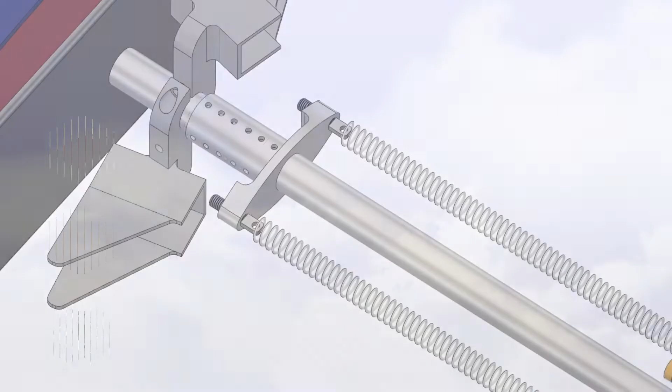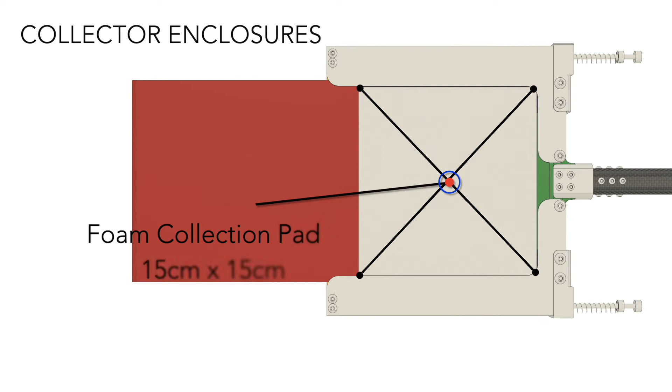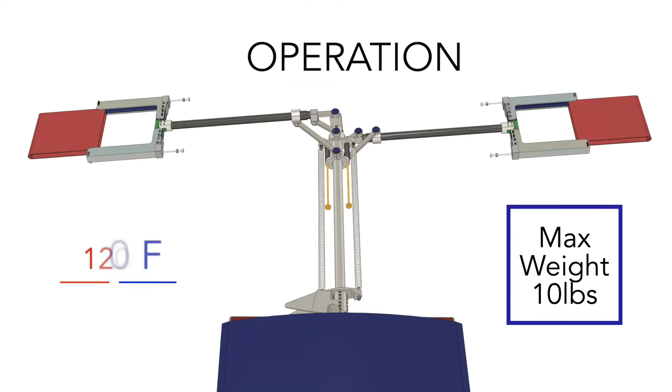The drive shaft of the subassembly shall couple to the output shaft of the control module's motor. The collector enclosure shall open upon rotation of the system and expose the collection pads with a surface area of 15 by 15 centimeters. Upon activation of the motor, the lever arm shall extend to a pre-calculated 1 meter fixed position. The less than 10-pound subassembly shall operate between -40 and 120 degrees Fahrenheit while rotating in either direction at 100 RPM.

Our final model will include aluminum 6061, carbon fiber, polycarbonate, and Teflon. This design was constrained to be a completely mechanical subsystem to improve the reliability of operation. At the same time, our team worked closely with our partnering electronics team, Icarus, to ensure compatibility between the control and collection subsystems.

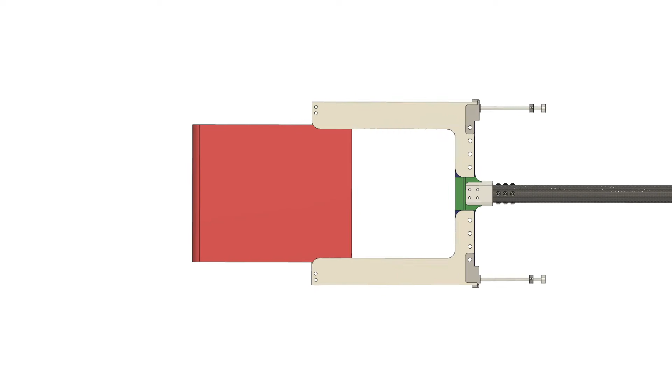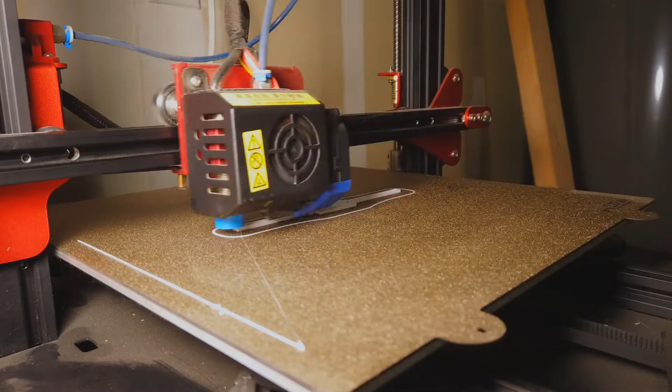Fusion 360 provided 3D modeling capabilities to create our design, animations for visual demonstrations, and 2D drawing functionality for fabrication requests. After creating the 3D models, we used Cura to slice those models and prepare the G-codes for 3D printing. Printing allowed us to stay on schedule by creating the necessary parts to complete the prototype quickly and cost-effectively. By controlling things like infill, wall count, speed, and bottom and top layers, we were able to control the quality and time necessary to complete a print.

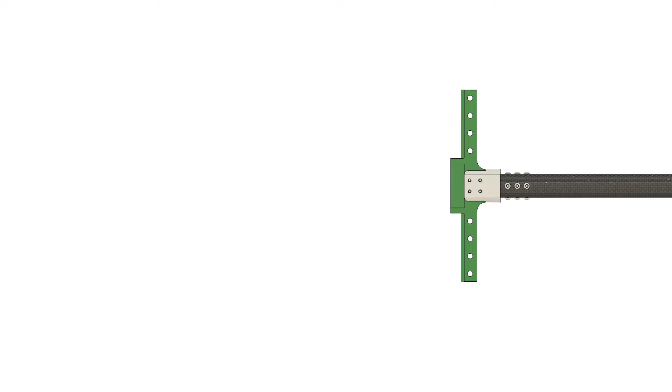It was evident that with the number and complexity of custom parts needed, it would not be feasible to manufacture them ourselves using university machines before the end of the semester. We first reached out to third-party machine shops around Texas, but received high-cost quotes out of the desired budget of the project.

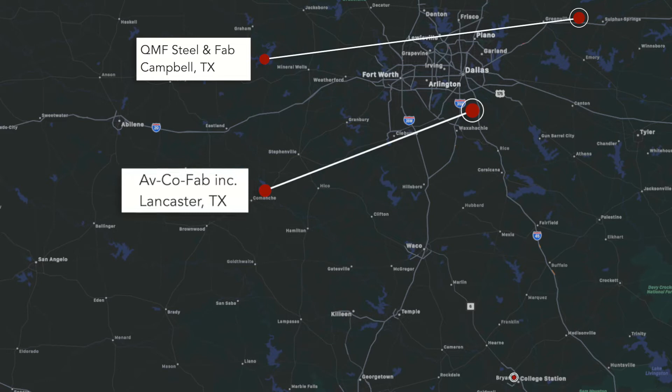It was then decided to utilize the FEDC's fabrication request process on campus, which only requires the purchase of raw materials. It was then only necessary to submit engineering drawings and model files to the FEDC, and material orders through our sponsors in order to manufacture the 85 total parts. This approach allowed for minimization of cost without sacrificing lead times.

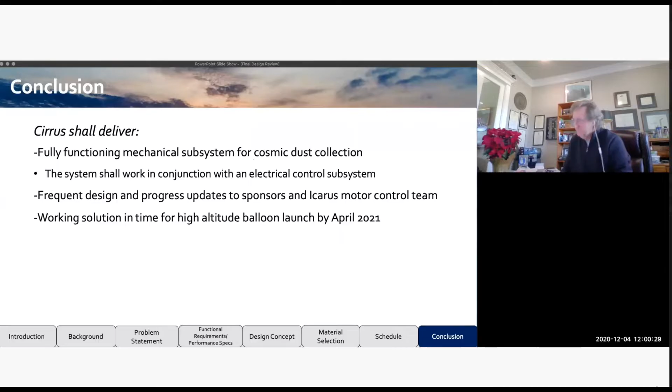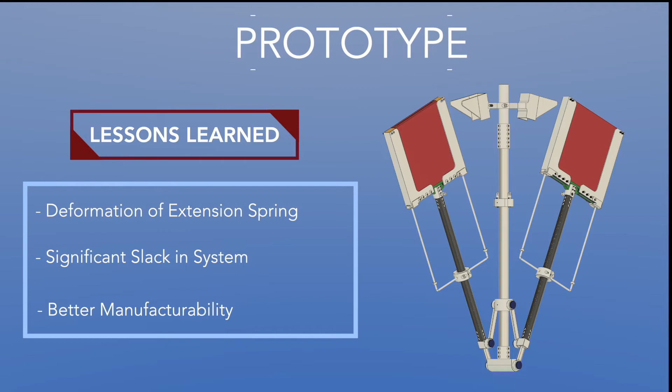Throughout our time, the team created many early models and concepts that were likely to achieve the desired function of the mission. After working out calculations and making necessary changes, a prototype of the design was printed and built that was tested as shown here. The prototype was a pivoting lever arm that used a simple extension spring attached to the top of the enclosure arms. This design in theory was mathematically and mechanically sound.

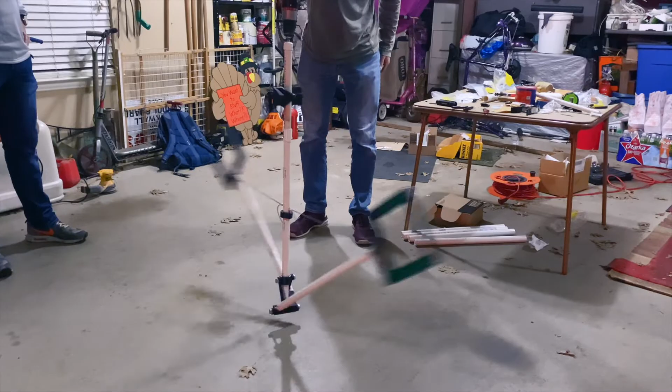The prototype was made from PVC and 3D printed components to allow for modifications to be done quickly and to reduce the cost of testing. The feasibility of the centrifugal pivoting concept was confirmed with our testing, but the team realized many improvements needed to be made for the final design to ensure reliability and effectiveness.

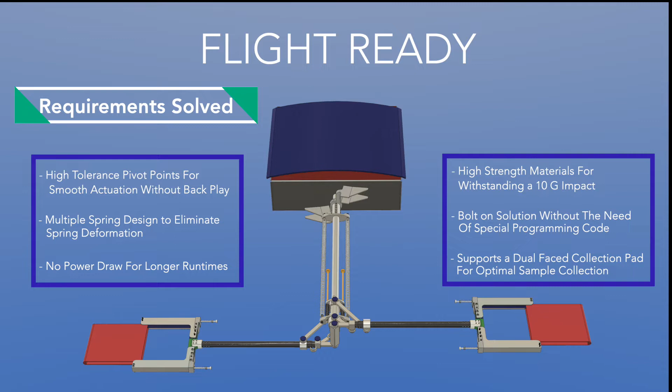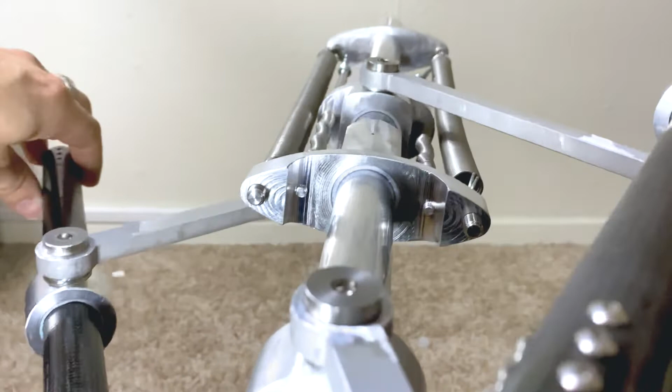Shown here, the final iteration implements multiple springs in multiple locations to improve actuation and the slack within the system that can be seen in our prototype testing. To ensure low friction movement between moving parts, as well as to eliminate the likely risk of contamination from liquid lubricants, Teflon bushings between the main shaft collars and Teflon rails are used for the material's low outgassing properties and low temperatures.

A major feature of the assembly is that the collector arms allow rotation in either direction. The symmetrical nature of the subassembly removes the need of complex and redundant components, which decreases the need for adding weight to balance the arms during operation, while additionally increasing the allowable weight for energy storage within the motor control module.

The last critical feature during the operation of the subassembly is that the enclosures can collapse and return to the protected stored position in a power loss event. This is an advantage of the team's fully mechanical assembly to allow for the longest collection periods possible and to ensure safe sample collection for future research studies.

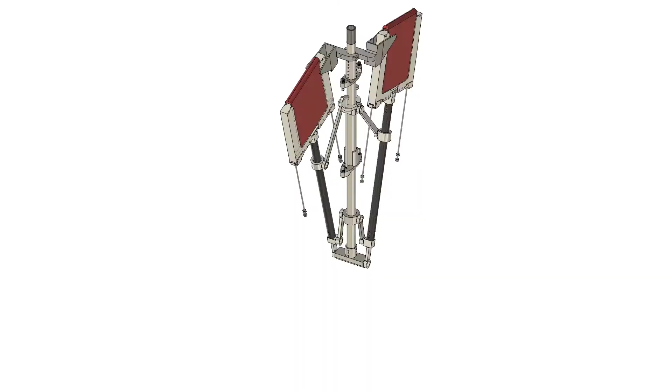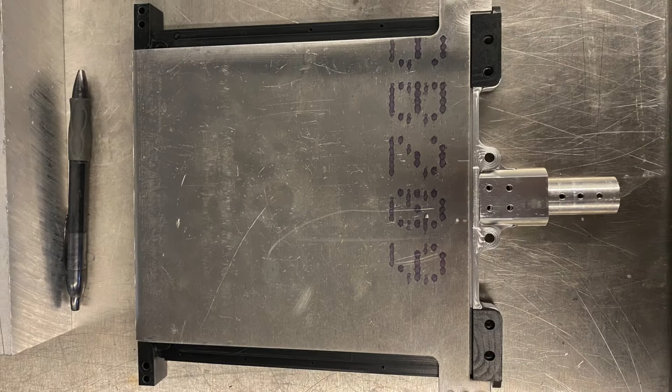As the team worked through design iterations, two major focuses were towards spring extension distance and weight savings. Our design combines unique geometry and strategic material selection to shed weight in unnecessary areas. The team worked with the shop leads at the FEDC to optimize each part such that they are light and easy to manufacture. This allowed us to achieve an estimated weight of 9.1 pounds in the flight-ready model, which is less than the maximum 10-pound limit.

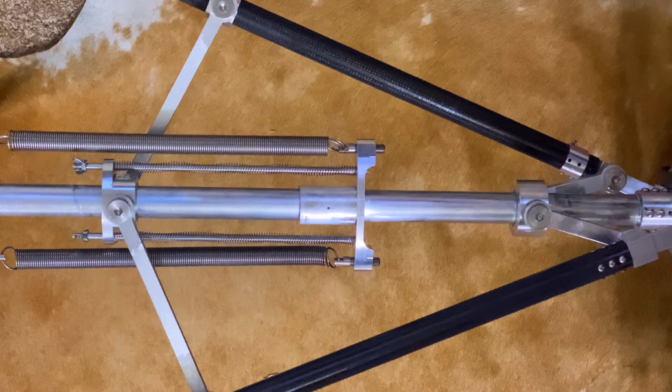The spring constants, placement, and actuation method were chosen to create the minimum distance possible required for spring travel. To accomplish this, the central shaft holds a housing that combines 2 extension and 2 compression springs. The extension springs pull the enclosure arms halfway to their upright position. From there, the compression springs push the rest of the way until the arms are locked and vertical. This combination of spring force is strong enough to hold the enclosure upright while still allowing the centrifugal force from rotation to push the arms down into their operating position.

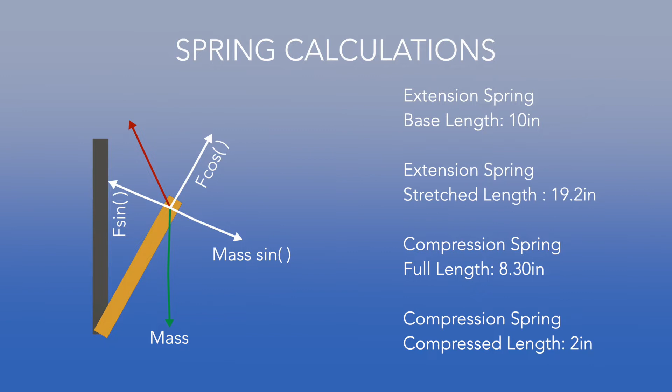This team is diverse in several ways. This allowed great balance in approach and communication, with a healthy team nucleus being formed on Zoom despite the restrictions of COVID-19. A professional nature with a cultured environment existed on all 3 platforms we use as a team for internal and external communication. Microsoft Teams was an easy choice as an internal collaborative platform. The team exploited its services to manage documents of all types from a central, editable, and trustworthy software.

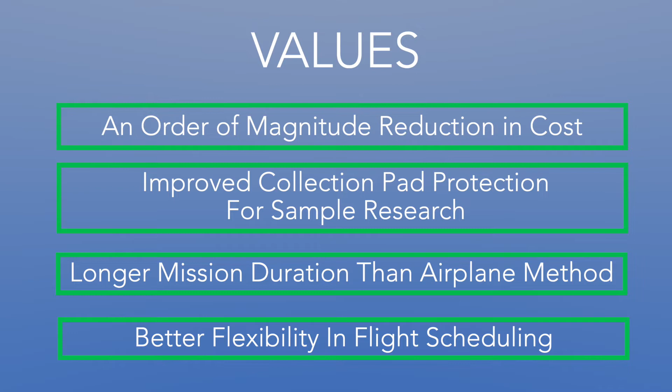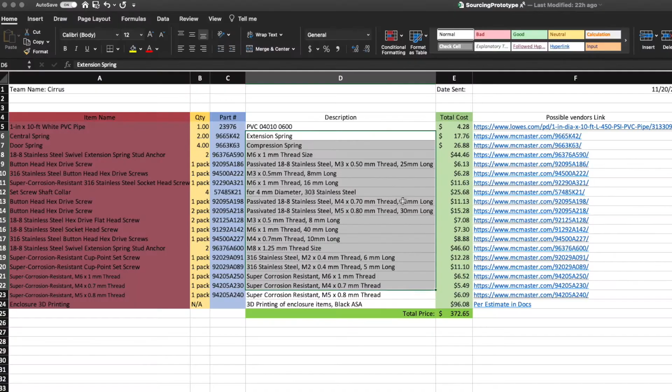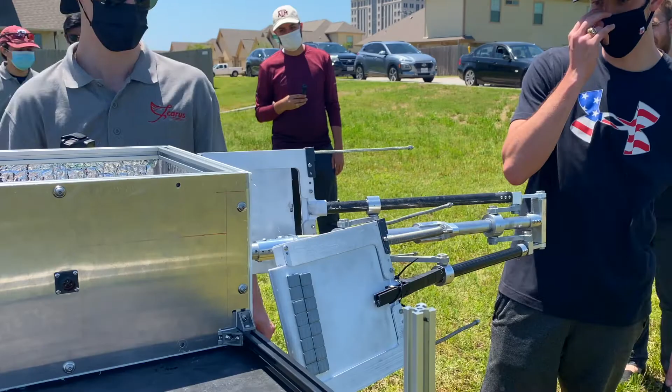This evaluative process required technical decision-making at every level of this project. Team members continuously and coherently made well-informed, project-mindful decisions with a goal to finish on schedule and on budget in mind with every step. This project was a unique opportunity for us as students to experience a workplace-realistic team environment. To achieve success, team members had to master external communications for raw material ordering, manufacturing requests, and delivery of finished goods. In the words of Professor Leonard, this project was an instrumental learning experience because it allowed students to come together in a multidisciplinary fashion to create a project that satisfies the customer needs.

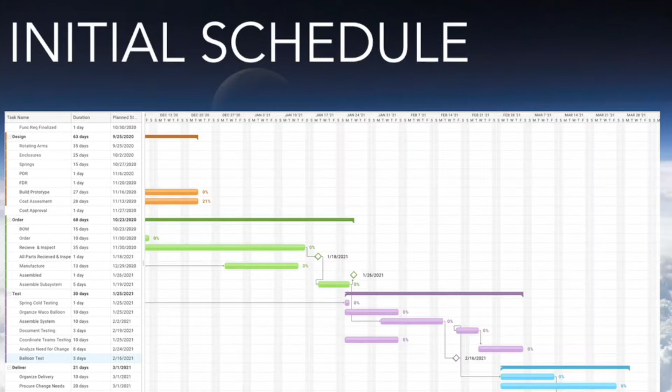The team's lessons learned and scheduling were in coordination with our original assumptions on lead times for manufactured items. When sponsors decided to use the FEDC as a manufacturing source, the team agreed to present several shifts in the timeline. The original deliverable date was an eager early one in late March, but of course the schedule included buffers and milestones which accommodated things like extended lead times due to COVID and increased timing setbacks like the snowstorm.

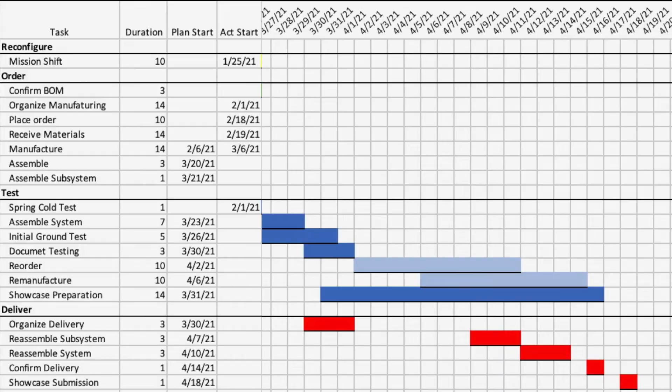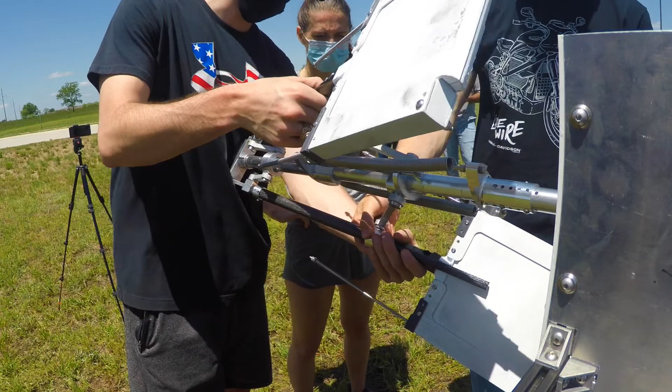Through utilizing the FEDC, our team was able to keep the overall cost of the project at a minimum. In reference to the cost, quality, and speed triangle, this led our project to lean in the direction of cost and quality while experiencing longer lead times due to the immense number of projects that the FEDC was currently carrying out. With recommendations from our sponsors, our team strategically ordered some of the parts to be 3D printed in addition to the fabrication requests to ensure that a non-flight critical model could be delivered by the close of the semester.

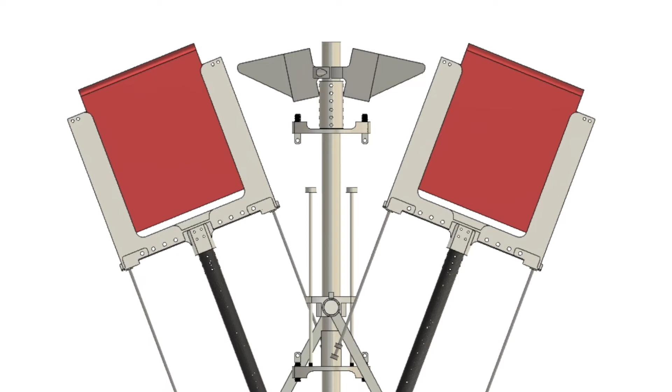Many lessons were learned in regards to the relationship between time available to deliver the product, the quality, and the available resources, which, in the words of Dr. Morgan, are typically beyond single capstone team exposure. The result of the high-strength materials combined with a folding stow system produces a high potential for reusability without heavy maintenance required by the customer.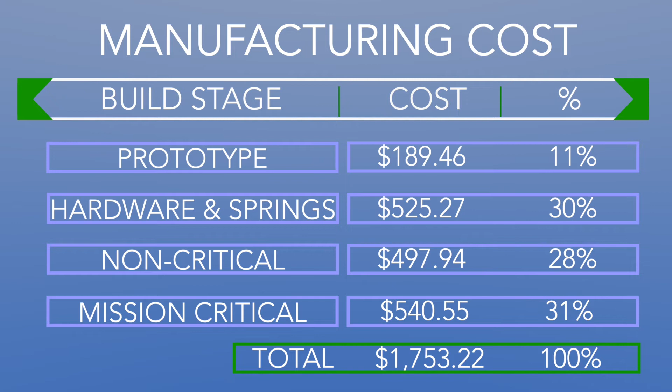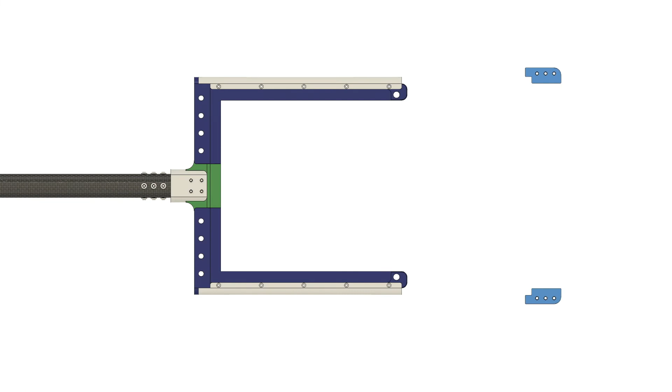I'm Dr. Mark Fries, and I am the curator for NASA's Cosmic Dust Collection. The instrument that this team is building will be used to collect dust from the Earth's stratosphere coming down to us from asteroids and comets, and it will be made available to the world's researchers to request and study in their laboratories.

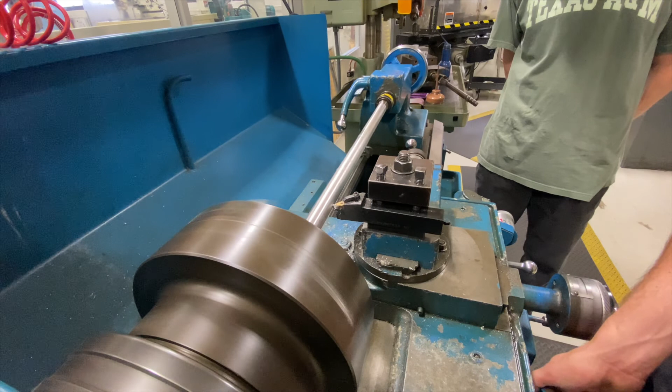Howdy, my name is Matt Leonard. I'm the President and CEO of Texas Space Technology Applications and Research. Cirrus did a great job of coming up with a very innovative solution for the problem, as well as persevering through several struggles with getting the design implemented and then actually made. One of the best parts about this to me is Cirrus actually came up with a working prototype.

The other part that's really amazing about it, this is one of the first times I've seen capstone teams have to work with other capstone teams in other disciplines, as well as working with other teams that were building rotating arm assemblies. Throughout that, Cirrus did a great job of communicating with all the other teams on what their requirements were and how they were going to interface with them.

To close, we would like to thank our amazing sponsors and the university for this unique opportunity to collaborate on this project with NASA and T-STAR. It is so rewarding to have been able to design and produce a subsystem ready for flight, and we look forward to seeing our project in action.